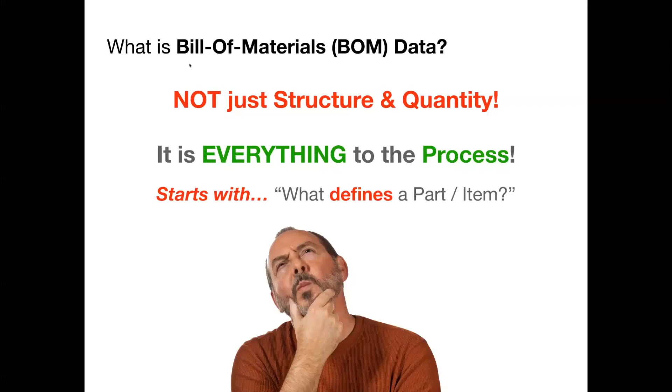BOM data is really, it's not about structure and quantities anymore. It is everything to the process. So it typically starts with what defines a part item, and then how is it going to kind of propagate out of the CAD environment through the rest of the organization, all the way down to a customer in many cases.

Many of the BOM failures we see typically result in these things, which I'm sure we can all somewhat identify with to a certain degree. We've all seen situations where incorrect purchases have been made, incorrect manufacture has been done, incorrect builds, late deliveries, and of course the worst of the worst is increased warranty costs. These all are very avoidable if the data is correct up front, and that is a huge challenge, especially when you're working with a very one-to-one relationship between the user and the data that they're working with in the CAD system. So that's part of why Nitro BOM was created, was to try to make that process a little bit easier and a little bit more agnostic so that it could be viewed, modified, and updated very quickly.

Excel is the choice that we made because everybody knows Excel and everybody uses Excel. The most common solution to these problems is pretty much just get the job done and fix it downstream, typically in the PDM, PLM, ERP, or MRP environments. The problem with that is, yeah, it gets it out the door, but it typically kills the traceability of problems when they come up later in stream, with a lot of time wasted trying to backtrack when new information entered into the equation of a part's life.

It may have occurred in a PLM system, or it might have just been ad hoc entered into the ERP system. And there's just a complete disconnect between what's actually being ordered and what's actually being viewed relative to what was actually in the CAD system and ended up on the drawings or the model-based definition that's been published.

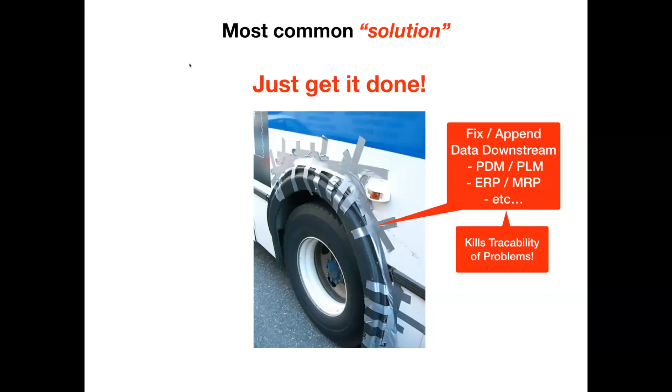The most common struggles we see are really in two key areas. One is the changing standards and requirements, meaning the failure to keep item data current. The other big area we're seeing over the last 10 years or so is moving from that print-centric approach to data and the creation of data, to more of a data-centric model, which is we need to feed it, get it as high quality as possible up front, and then let it flow through the system for consistency.

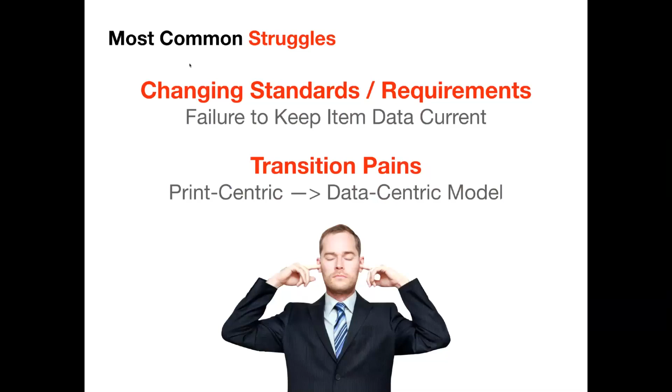When we're talking about failure to keep the standards current, basically this is a problem mainly for companies that have been using CAD for a longer period of time. But most people, when they start using 3D CAD systems and start getting into PLM and so on, they typically focus on what they used to do before and keep the information in the models to a bare minimum. So what used to start off with like 5 to 10 parameters per model or assembly, today it's not unusual to see 50 to 100 plus parameters associated with a model.

All of that data is very important, and it's becoming much more tightly integrated to the enterprise, meaning it's got to be correct up front, otherwise the downstream processes suffer.

The biggest problem we see is just that inability to go back and fix old things. So when we start getting into item reuse scenarios where old designs are being copied forward and then modified to create a new variant, sometimes the data is just not updated to the current standards because it's a very tedious task, especially when you're dealing with quite a few models in an old assembly, or even old library parts that just need to be brought forward and used to today's standards.

The transition really is broken into two areas. Number one is the print-centric approach to modeling. This, to our surprise, is still occurring to this day. We just got an email about it the other day, where people are still viewing the print as the master, meaning that's what we generate. We generate drawings, that's what comes out of engineering, and then it's thrown into purchasing or into manufacturing, and then they deal with it and work with the data on their own.

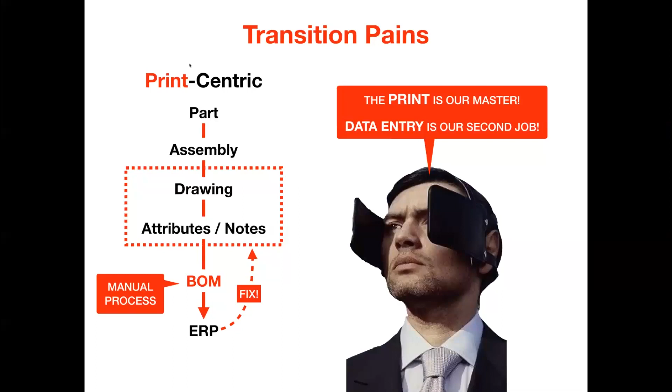Most of the companies we're working with, and trying to guide towards, is really more of a data-centric model, which is focused on the data first, and the prints are really second. The drawings are still kind of a needed thing. Model-based definitions are picking up a lot of speed over the last probably 5 to 7 years or so. But really the whole point of this is to focus on what the company buys as raw materials, fasteners, standard purchase components, things like that.

Feed that information into the parameters and values associated with the parts and assemblies as early as possible, and then go from there. Because if that data is actually put in correctly, it's a lot easier to get the bill of materials out and make sure it's in sync for anywhere else it's going to be used downstream.

Across the enterprise or even all the way out to customers in some cases, this is a difficult thing for companies to do. When we look at companies with distributed engineering resources around the country or world, keeping this in sync is very painful, especially when dealing with different units or different locales for what can be bought, like raw materials. The raw material names and options may differ in Europe versus the United States, but it still has to be identified early so that no matter where the CAD data goes—since it flows freely between facilities and manufacturing organizations around the world—it has to be consistent and as accurate as possible.

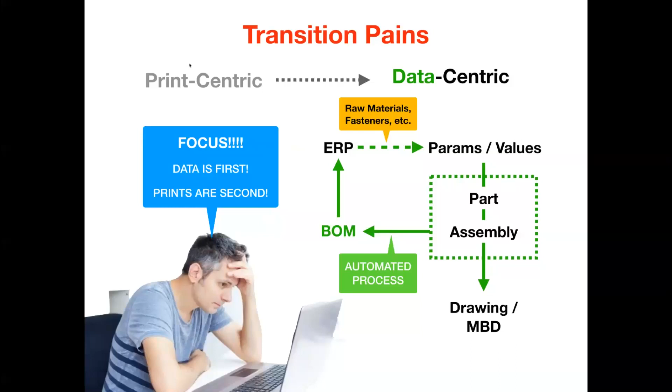Some of the common pain sources we see are really just inconsistency, meaning different users produce different results, and inaccuracy within that process—missing parameters, values, inconsistency in how things are typed or entered manually. For example, a weldment isn't really a weldment if it's not spelled correctly, and that can create problems downstream, or a mistyping of a parameter name, where somebody manually enters it, can cause a lot of headaches within the bill of materials and everything else attached to it.

Another big issue is the translation of data. Sometimes the engineering parameters that are chosen and have been around for a long time are not typically what the ERP system needs. So if you have a particular name like drawn by, designer, or engineer for a particular parameter, that may not exist within the ERP or MRP system, or the value is completely different—a shortened, truncated version of what's actually needed. It's not really limited; there isn't a one-to-one relationship there.

The other big issue is just the manual process. It's very difficult today, and has been for a long time, to manually extract data out of the CAD system and get it into a usable format. Everybody runs to Excel because that's where they feel most comfortable, and that's what's passed around for reviews and everything else for the most part. So extracting that data has always been a bit of a challenge, along with the time to review it and make sure it's correct and in sync with other systems.

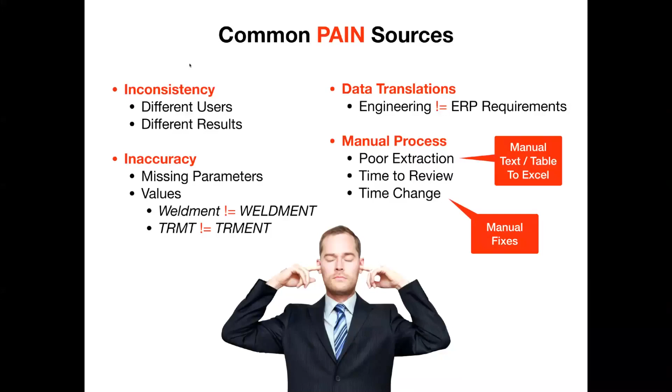So this is part of why we built Nitro BOM. It came out of our own frustration years ago from doing these things manually, and we tried to come up with a very generic tool. A lot of it has been customer driven, based on feedback as to what it needs to do and what features it needs to have. So we really focused on addressing the consistency issue up front, making sure any user at any time could get their head around what's going on with the structure before them and be able to modify or update it with ease.

Of course, when you're in Excel, you can see things a lot clearer than hunting and pecking through the CAD system's menus for different parameters and values, or setting up tableized views of data within the model tree. So finding gaps is very easy in the data—if there's a missing parameter or incorrect value, it usually stands out pretty well, especially if it's in an incorrect format. If the data type of a particular parameter changes from one model to the next, it stands out like a sore thumb within Nitro BOM because we flag those types of differences as we go.

The data translation is also another key thing we focused on. We realized that a lot of the data that comes out of the CAD system, if a company doesn't have a PLM system fully integrated with the rest of the enterprise, sometimes they've just got to get the data out and pass it over to the next department as a CSV or Excel file for them to import. That has to be as clean as possible and easy to organize and structure. So that's another key benefit of Nitro BOM—it includes the ability to map parameters from the CAD system to wherever you want to go very, very easily.

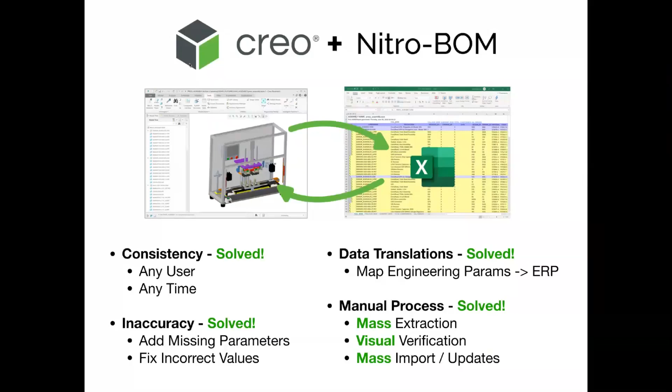And the other big ones is just the ability to do a mass extraction of the data, do a visual verification of it, and then do mass imports and updates on the fly. One of the other big benefits of Excel, something some people know about and some don't, is our pro tip: it has really turned into a much more capable piece of software over the last 10 to 15 years.

There's this thing that not many people know about. It's called Power Query. It may have popped up in the past, but the more we've looked at it over the past several years, and the more we've been able to do with it to advise customers on how to connect to the ERP system to get the current raw materials list or fasteners list and bounce that off the bill of materials coming out of Creo to make sure things are in sync, then push the data into Creo so everything is as clean as possible, is often a bit of a struggle.

Some people have typically thought they had to go to the IT department and have a custom report written, then get that in CSV format, make sure it's imported correctly, and go through a lot of hassle to sync it together. But we found that Power Query makes that process very straightforward when you want to pull data from other systems and synchronize it with the CAD data's BOM and push it back into Creo. So it's one of those best kept secrets in Excel.

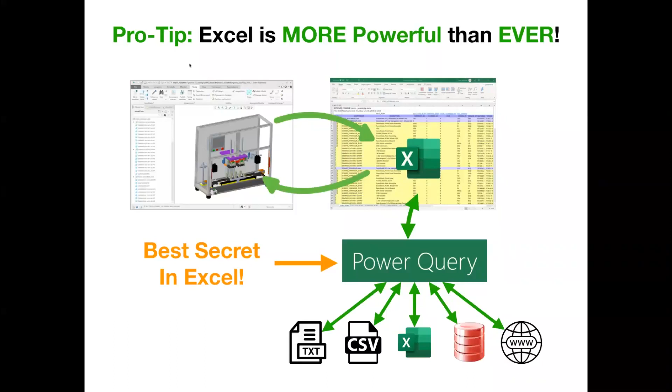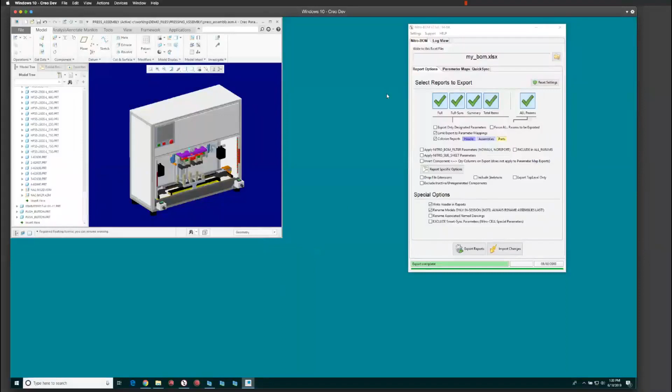So with that, I think we'll just jump in and play with it here. Let me pull up a different one. Give me just a second to change over here. Okay, wait a minute, stop sharing that. And then we'll go over here. So I assume you can see my Windows machine here.

So what you're looking at here is just a very basic assembly. It doesn't have a lot of complexity to it. It has some depth to it, but this is just something we grabbed off the internet as an example to start with. And over here we have Nitro BOM.

So Nitro BOM has several different reporting options. You can basically turn them on and off as you go, and we're going to leave everything on for right now so we can go through it. You also have more controls over how you want the information presented. For example, if you want to drop the file extensions so you don't have that to worry about in the bill of materials, or disable the headers, or customize how the leveling of things are displayed, all that is very controllable through the application.

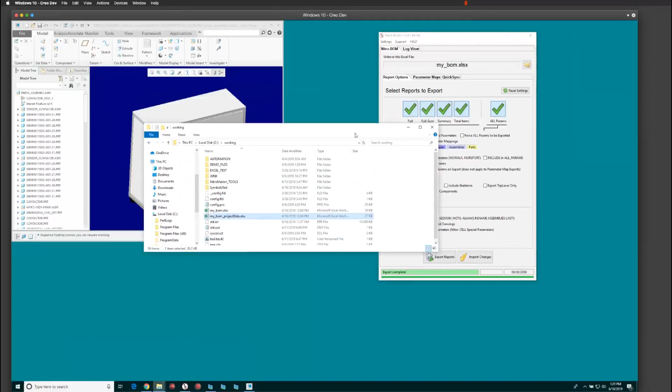You can start with any Excel file, so you can append data to an existing file or create a new one if you want. I've just started off with this very simple, empty worksheet here. And then I have another worksheet that we'll talk about later, which has maybe some tracking data in it that was pulled together as an example to identify other attributes from other systems that might be of interest relative to this BOM.

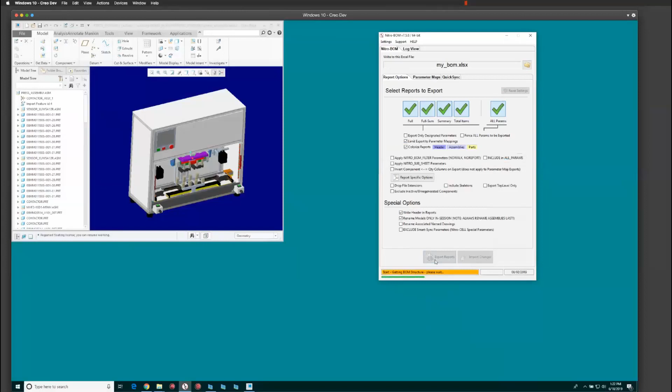To export the bill of materials, all you need to do is identify the file you want to write to and press the export button. Now we're just taking all the standard default settings for the application, and it's already grabbed the information out of Creo, written it to Excel, and informed us that everything is complete.

Now this actually generates information in several ways right off the bat. The first report you see here is what we call a full BOM. It's basically everything reported once, regardless of the quantity. So if there are two of the same item in here, like you can see there's two items here, it's reporting the count of two in the structure because it's not compressing it at all. But it at least gives you an idea of what's here, what's being applied, what's not.

And then the full summary BOM is the same report, just compressed with the quantities of each item in the bill of materials within the CAD structure. The summary BOM is basically a breakout of each subassembly with the quantities of each item in it. And then the total components is basically a roll-up of every component and the total count across the entire structure.

So these sets of reports here are pretty much what everybody's looking for right off the bat. I need either a full or a summary of the stuff, I need breakouts of each assembly, or I need just a total components count, and I need to have that at my fingertips quickly.

The other report that's here is something called an all params report. This is actually one of the main reasons that people purchase Nitro BOM. It's the sheet that shows us every model in the assembly reported once, and every parameter in each model reported once, and the cross-up of the two is the values for that particular model and parameter.

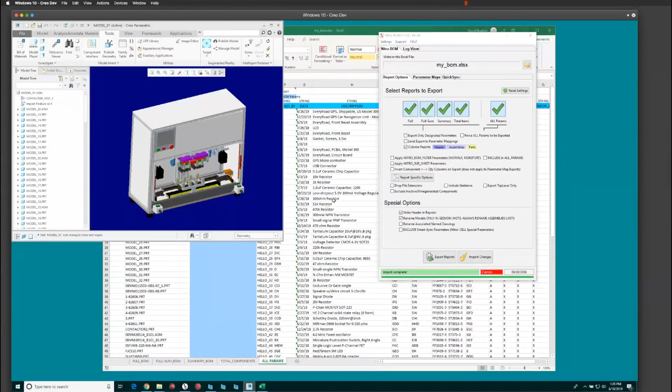Now that we've made these adjustments, we can come in and do a couple other nice things. We can say, well, maybe I don't want all of the parameters to be exported in all of my reports. So I'm going to tell it to go grab all of the current parameters that are in the model, and maybe there's just a handful I'm interested in. So maybe I want to get rid of these, and slide these up in the list.

Maybe design by is actually ENGR in the target system I'm going to. Let's say material is another name, like MATL. And let's say finish is actually FIN in my ERP system. And let's say we don't need modeled by or checked by. Well, actually, let's just get rid of that. We'll say modeled by, let's get rid of that one too. And let's see, I guess I have to put in... get rid of that. Okay.

So when we've made these adjustments, we've pruned down our list and reorganized it. We can now export this. We can say I want to include this parameter map, and when I export this, it's going to update all of the reports that are coming out. It's going to reduce the amount of data that's presented. So when this is finished, you'll notice we have less content, and it's also translated the outputs to other names. From this point forward, we've got something that, very quickly, we can export or hand off to the next department to load or do something with quite easily.

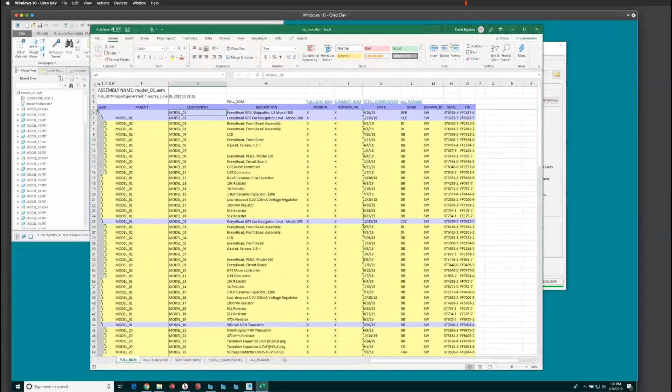And Dave, if you had anything else you want to show, I'll let you know if we do get any questions. But yeah, I can show at the moment. I could show one quick thing.

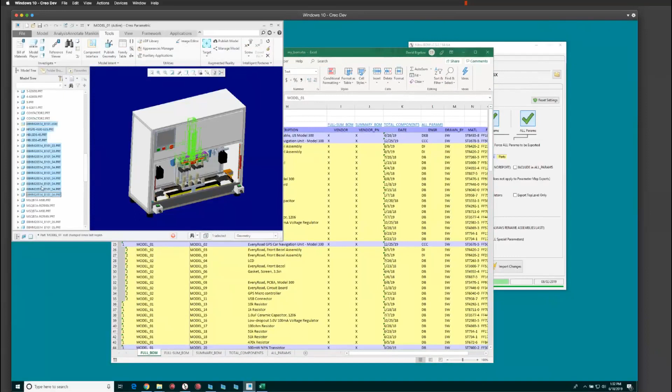As I said earlier, there is the ability to synchronize data. So, for example, let's say I wanted to modify... well, one question is, what happens if the structure changes? So I'm going to grab a handful of these items and reorder them, and this happens quite a bit, right? Sometimes things just get shifted around, or they get moved because the structure has changed. And the common question is, well, what happens then? Well, this is the beauty of Nitro BOM. It's really just a re-export of the current structure, and you've got the latest updated information just that quickly.

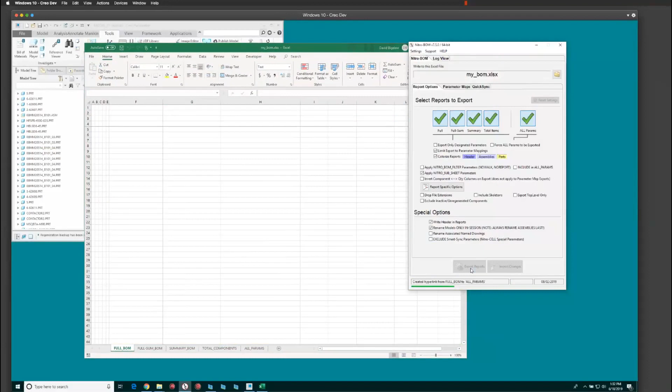So it is quite handy. We've enjoyed it as a tool, not just for our own use, but also we have quite a few customers that are finding it handy.

One thing I will tell you is that you do have the ability, for example, on a corporate installation, to load it on a shared network drive, or distribute it amongst the different desktops if you want. But you can also set up what we call a config file. It's very similar to a Creo config file, which has predefined settings. So if you have a predefined standard for how information is to be exported or presented to different users, you could do that easily just by coming up with a corporate standard, saving it off, and then people can use that setting all the time.

This will give you an idea of getting away from the extra information that we put into the Nitro BOM reports, to get it down to something people are fairly typically used to seeing, which would be something like this. So in this case, we've got a report showing the parent, the child, the description, a few different pieces of information here, and the translated data for the next system that may receive this, or that we may want to merge with or use in some way, for example like with Power Query to do updates and then push it back into Creo.

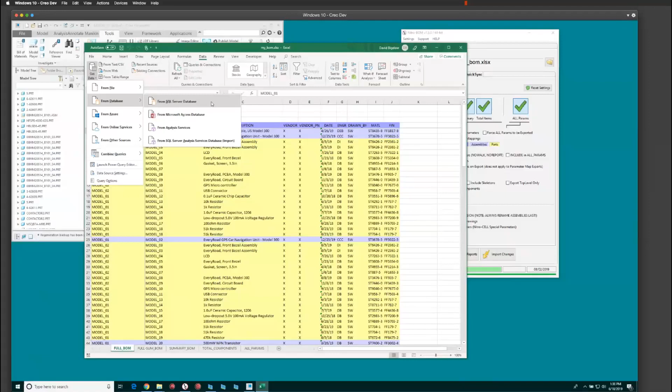All right, well, I don't see any other questions. That was certainly a really good one. As far as is it unique to SAP, obviously no. Once you have it in Excel, that can be your source to go into any other table structure. As Dave mentioned, SAP is Oracle-based, but if you have a SQL database, the same would be true, of course. Or even just a text file.

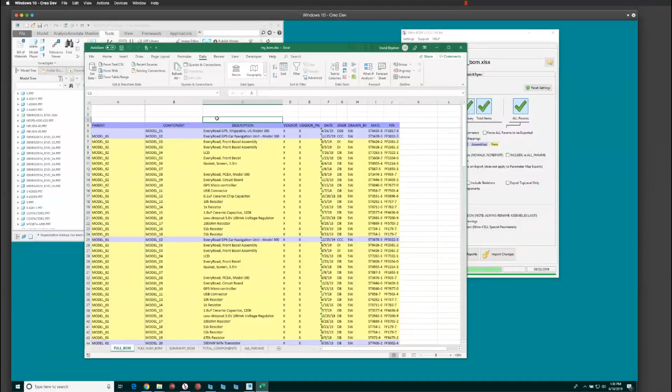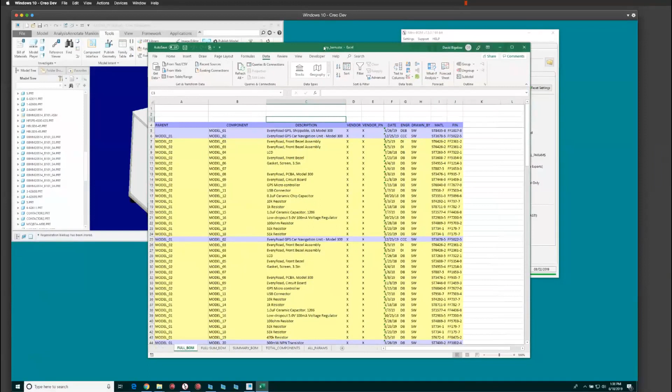It's one thing about Excel that's really matured over the years, the ability to interface with different systems quite easily and allow you to keep focus on the data before you, without having to jump through different environments and different languages to get there. Yeah, that's maybe one of the beauties of Nitro BOM, that it brings everything into and out of Excel, which is probably one of the most ubiquitous tools. It can interface with everything, and everyone is familiar with it.

Even just as simple as, let's say you've got a typo on a parameter, you can just do a find and replace, and in every one of these you can update the parameter to the correct spelling of something. Exactly, I certainly wouldn't want to do that manually in Creo, that's for sure.